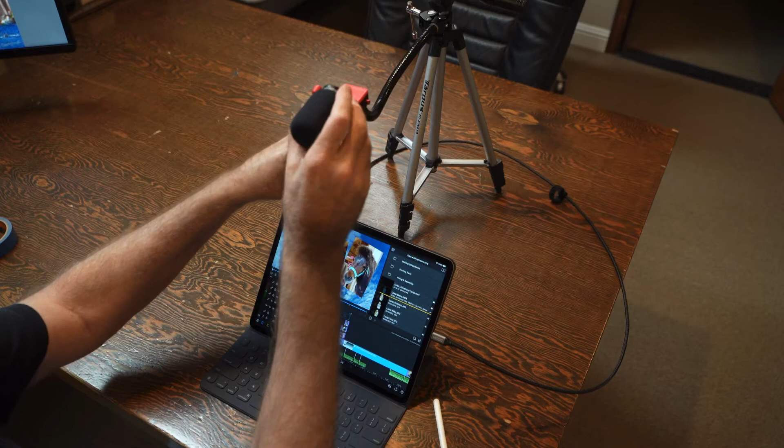So after I made the microphone holder, I realized that it'd be nice to have a clip on there to hold the cord. So in Fusion 360, I'm going to show you a more complete version of designing a part.

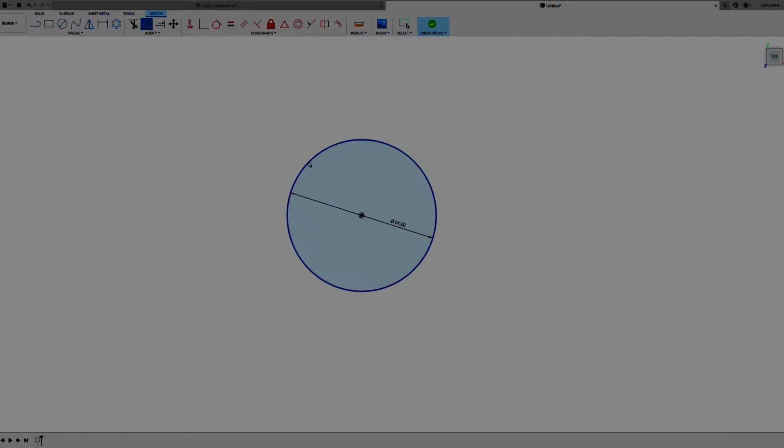First I'll draw a circle, the diameter of the flexible arm. Next I'll offset that line for the thickness of the clip that goes around the flexible arm. Then I can draw a circle that is the diameter of the cord.

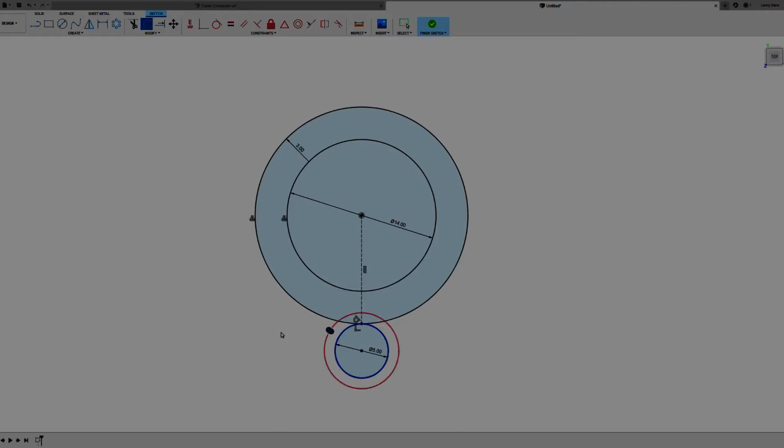Then create a center line, a construction line, and I need a snap point on my small circle. Then I can connect the two circles on their tangent, and then move the snap point to the center line, and then offset the cord thickness snap.

Then I can create another little circle here. You'll see what it's for in a minute. But I am going to connect it tangent to the inner circle, and then create another circle for the lower snap, and also connect it tangent.

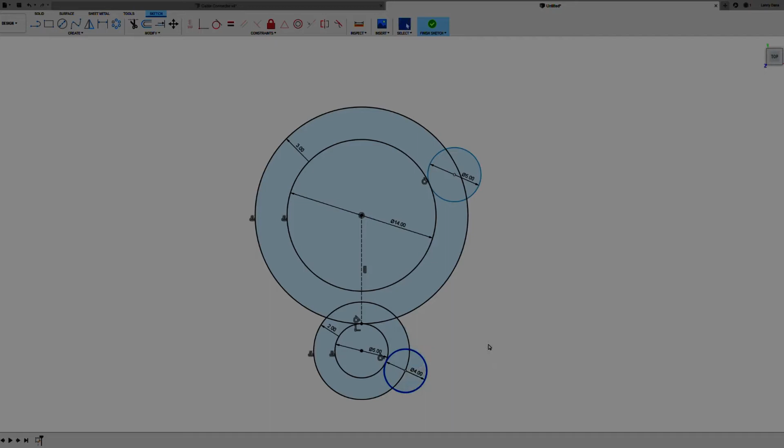And I'll just move these to the approximate locations where they're going to go. You'll see what it looks like in a minute. So I'll just put some dimensions on here to kind of lock it in.

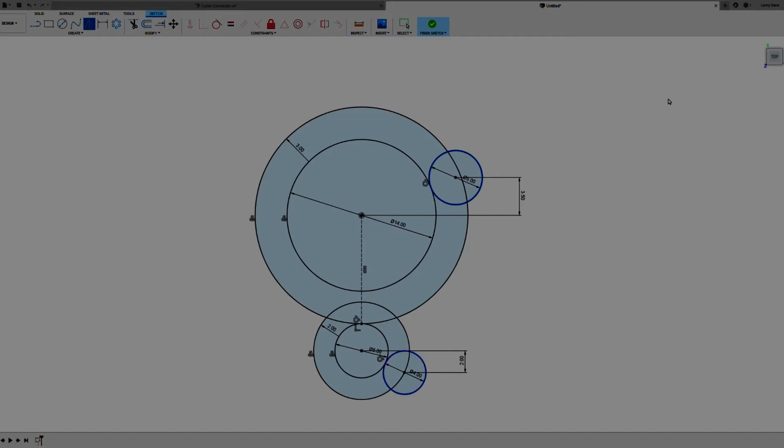And then I can mirror those two to the other side using that center line. And then we can just trim away the parts that we don't need. And there you can see it's going to have an upper snap and a lower.

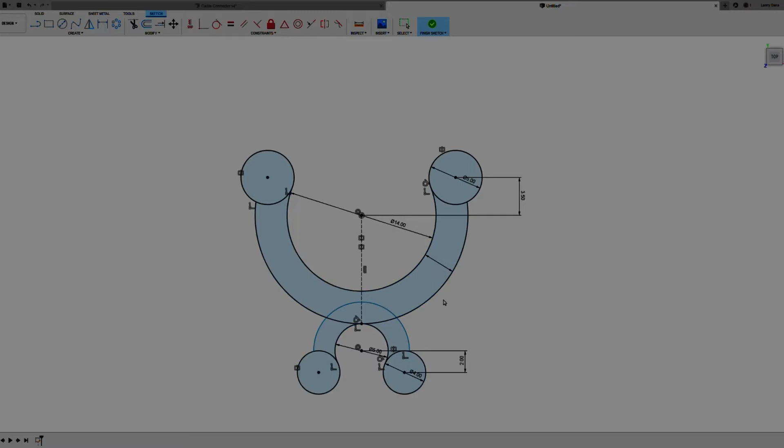And those little circles kind of act as decorative slide points. And then I just need to put some dimensions on these thicknesses, and the basic drawing is done.

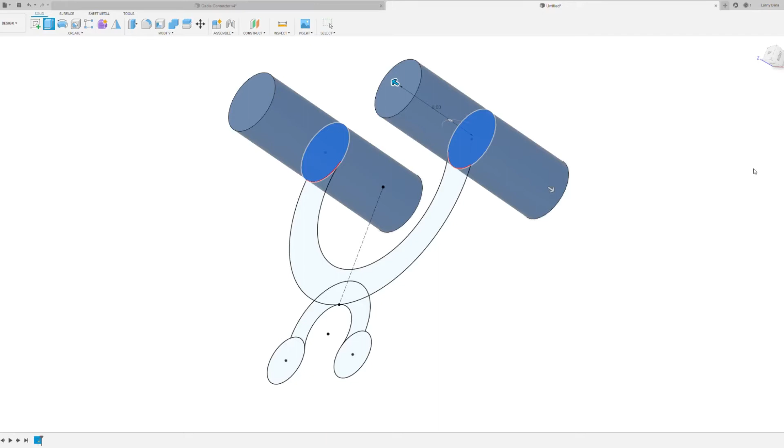Next, we can extrude the different parts to their widths that we need. So this is about 8mm for those slides, and then the barrel is like 6mm, and the lower barrel is going to be like 5mm, I think.

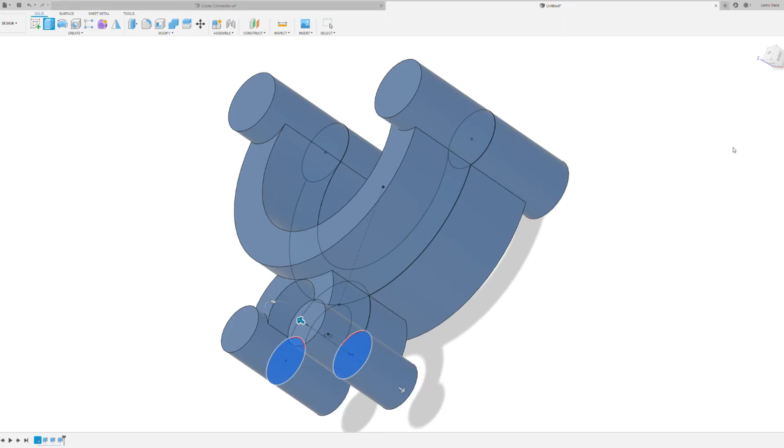And then just extrude these out so they stick out just a little bit more than the lower barrel. And then turn off the drawing and turn it around and see if it looks right.

Next, I'll spend a little time shaping it up and softening all the edges.

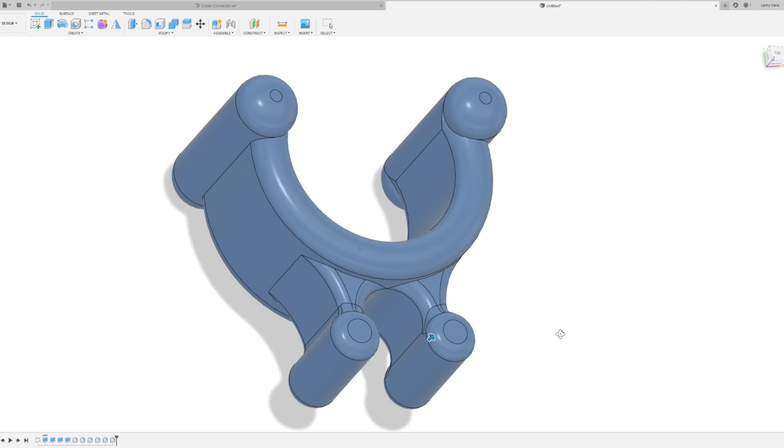Okay, I think that looks good. Time to print it.